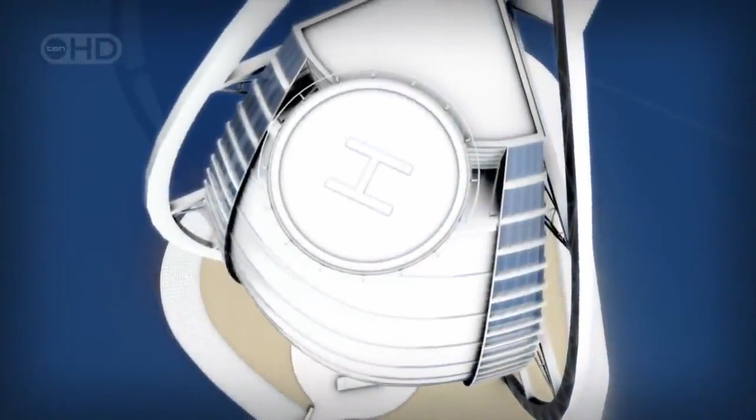Facing future economic meltdown, Sheikh Mohammed makes a crucial decision. He will turn his country into one of the world's most exclusive holiday destinations, a playground for the rich on the Arabian Gulf Coast. The Sheikh needs a luxurious centerpiece to launch his country into high-end tourism. He stakes what some speculate is over $1 billion on the tallest, most lavish hotel in the world, with a unique 7-star reputation, the Burj Al Arab.

I think it was very important to put Dubai on the map of the world. There's no hotel like this hotel. It takes guts, and Sheikh Mohammed has a lot of guts.

The Sheikh's courage is clear from his choice of architects: a radical young team from Britain, brave enough to take up the challenge, but very short on experience. They are led by Chief Architect Tom Wright. We had an average age of 32, not a grey hair between us, and none of us had gone over about 15 stories. I was quite staggered by the scale and the immensity of the project. Tom Wright and his colleagues have a reputation for innovative engineering, but they're more used to designing schools and offices.

But Dubai is a place where connections can make all the difference. Through a contact in the ruler's office, the team gets its break. Sheikh Mohammed agrees to a meeting and is so impressed with their initial concepts, he awards them the contract.

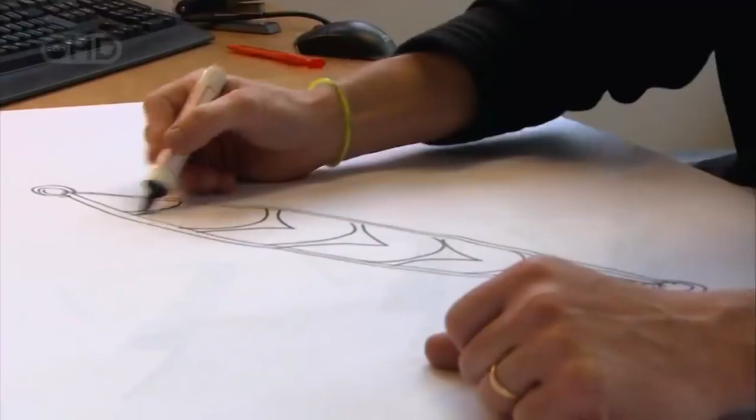Now Wright must turn his sketches into a design so remarkable, the building becomes a world-renowned landmark. We had many sleepless nights worrying that the building we'd designed wouldn't turn out to be at all iconic. Wright knows he must push his design to the limits. A building only becomes an icon when its form is simple but unique.

We decided that if you could draw a building simply with a few strokes of a pen, and it was instantly recognizable as not only the building, but the place - Dubai in this case - you'd created something that was iconic. So if you consider the buildings in the world, there are probably no more than 10 maximum that have actually achieved this status. Australia, Sydney Opera House. As with all these buildings, it's usually just the first couple of lines that actually make you know exactly where the building is. Paris - and you have to put a flag on the top.

Can Tom Wright and his team compete with the likes of Gustave Eiffel? This is a once-in-a-lifetime challenge.

All the brainstorming pays off when Wright finally has his eureka moment. We were sitting there having a beer, watching the modern sailing yacht come out of the Dubai Offshore Sailing Club. You think of excitement, you think of exhilaration, and we went, hey, this must be the one. The form we came up with is very simple, and within a few lines, I think you can see that it has all the elements of an iconic building. It's simple and instantly recognizable.

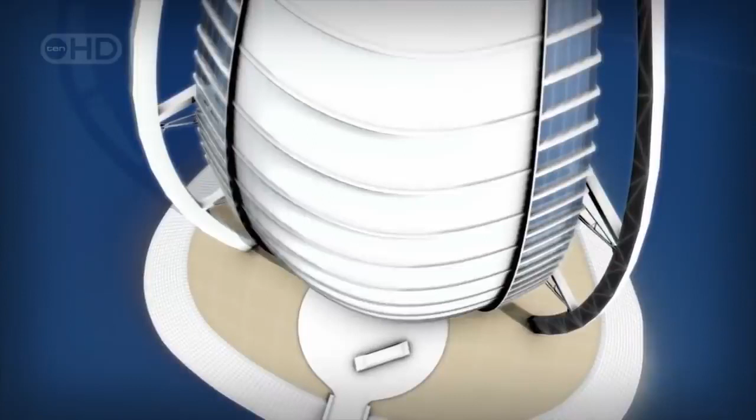Wright has won the first of many battles. The Burj will rise out of the sea. But time and again, his refusal to compromise will force his colleagues to push the boundaries of engineering to the limit.

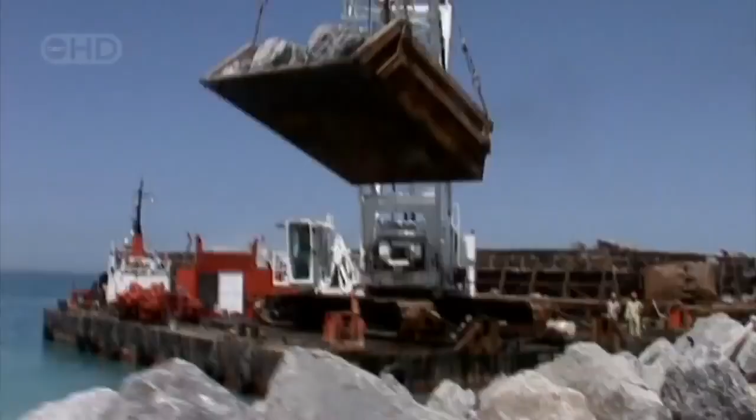By early 1995, the construction team is hard at work on Phase 1, building a low-lying island. But the inexperienced architects are about to get a taste of Dubai's extreme weather.

April the 27th. A powerful storm known as a shamal sweeps across the Gulf, hitting the coast with a vengeance. A set of construction barges lie in its path. Each is laden with 10,000 tons of rock.

The architects have planned for all weather conditions, but the storm's intensity still shocks Simon Crisp. We had 3 or 4 metre waves bashing onto the beach. To see the waves coming in like this was really quite a wake-up call for us.

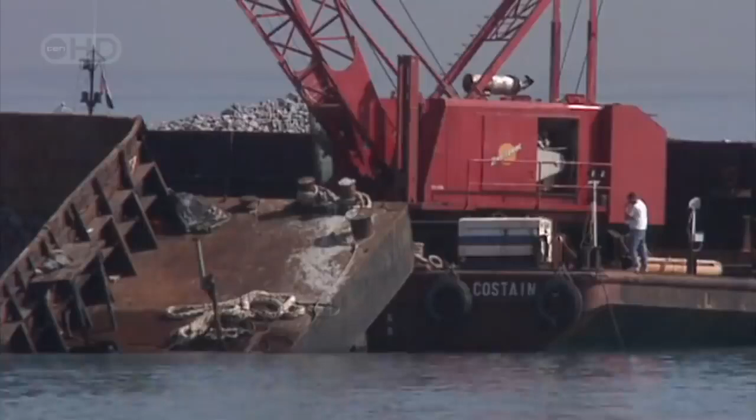One huge barge breaks loose and slams into the mainland. The team realizes the damage this kind of storm could inflict on their island hotel. We had a really graphic example of how powerful the Arabian Gulf can be when it's angry.

The architect's decision to expose their structure to these forces could have serious consequences. The engineers will have to struggle to produce a low-lying island capable of resisting nature's fury.

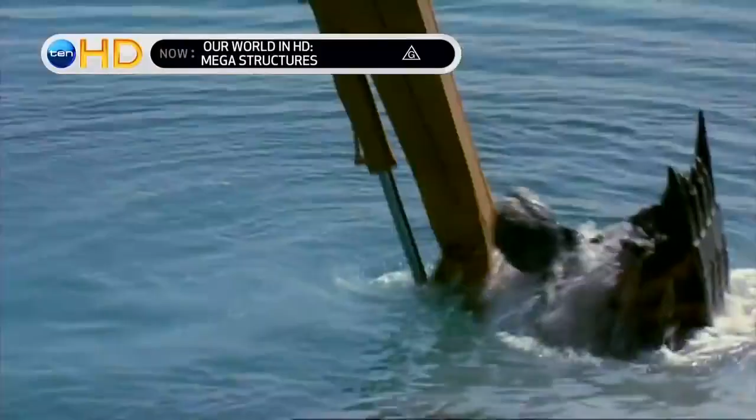The man-made island for the world's tallest hotel has hit a critical stage just 5 months into the build. Dubai's Sheikh Mohammed is depending on this project, the Burj Al Arab, to convert his country from oil producer to top-class tourist destination.

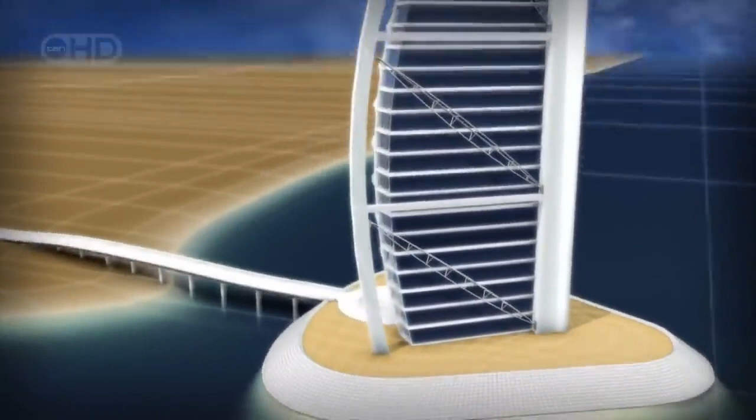But a debate rages over the island's height. Architect Tom Wright wants to make it low to give the impression of a sail rising out of the water. We argued a lot about the height of the island. From a design point of view, I wanted people to be close to the sea.

From the start, he's gone head-to-head with engineer Mike McNicholas, who's responsible for the island's safety. So I wanted the island as low as you possibly could, you know, skimming the sea. I'm coming from the other end, needed to make sure we were protecting the island.

McNicholas's worst fear is that waves breaking over the island could damage the hotel or even drag guests into the sea.

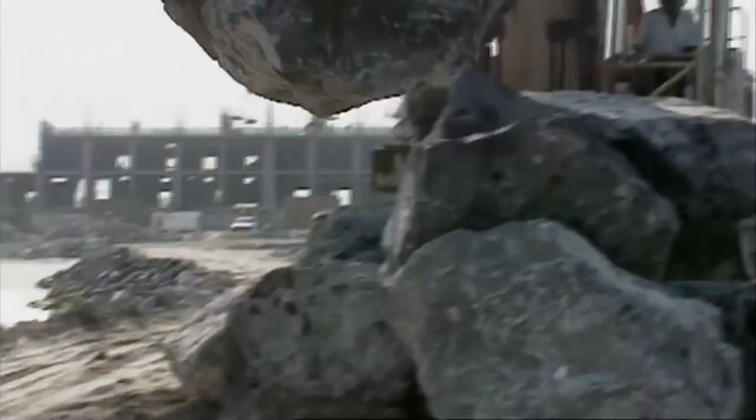Initially, the engineers planned to build the island using rocks. They are available locally and the technology is proven. But Wright rejects this. A rock island would have to be far too large to repel the sea safely.

To keep the island low, McNicholas experiments with pioneering concrete blocks designed to reduce the impact of waves. But no one in the Gulf has ever used these blocks before. I had to insist with the team that we carried out tank testing. It was the only way we were going to be sure that the island would be safe.

These tests replicate the power of the tallest waves that can occur once in 100 years and sends them crashing into a series of differently configured models. 3 weeks of testing prove the hollow blocks will work.

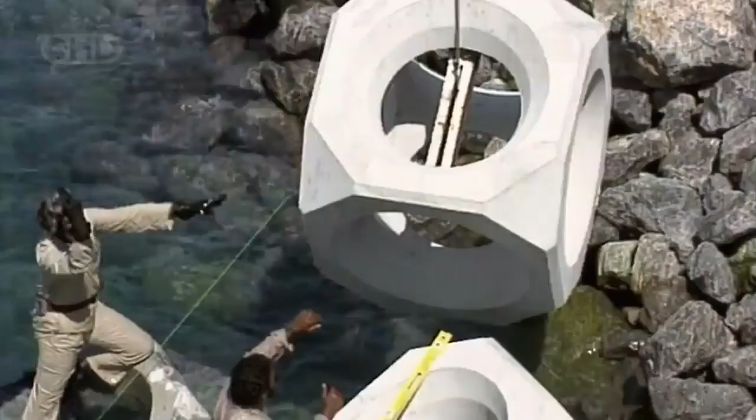The construction team builds the island with steep rock slopes, then covers them in concrete armor to absorb the force of the waves. These ingenious blocks work like a sponge. As the wave hits, the water passes inside the space and turns around on itself. The force is largely dissipated.

With the engineers' help, architect Tom Wright has won his battle for a secure island that rises only 7.5 meters above the waves. Now the team begins the second stage of construction.

In the center of the island, construction workers drive huge lengths of steel 20 meters into the ground. This creates a triangular steel wall known as a cofferdam, which will become the outside of the hotel basement once they excavate the sand from inside.

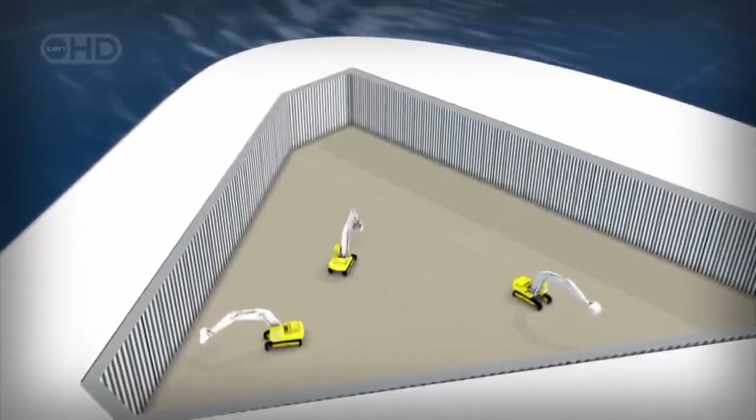But removing the sand could be dangerous. That was a real challenge for us. It's sleepless days and nights, 7 days a week, figuring out how we were going to stop the seawater coming into the structure, coming around our structure from beneath and flooding it.

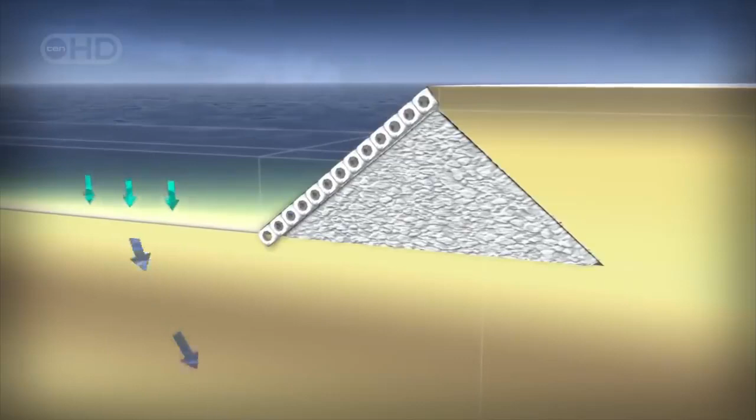The weight of the sea is a huge force on its bed. This pressure forces water through the sand and threatens to flood the artificial island from beneath.

To keep the sea out, McNicholas injects liquid cement into the sand to seal off his steel wall from below. But as the sand is removed to form the basement, there's less and less weight to hold back the force of the sea. The cement seal is going to be tested to the limit.

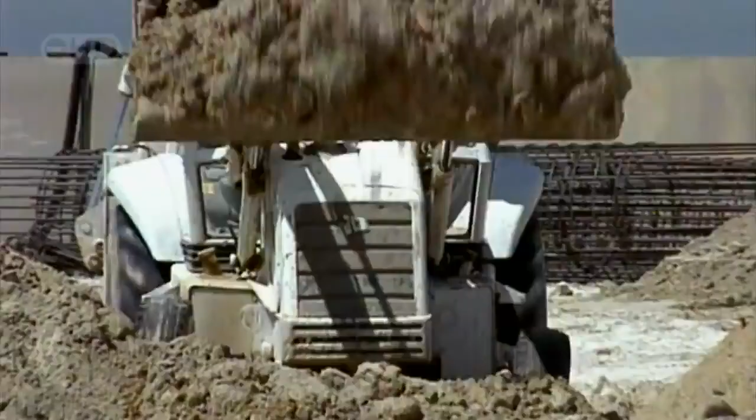In the worst case, the pressure caused by that water movement could have blown the whole bottom of the excavation like a champagne cork. If McNicholas's calculations are wrong, the excavation could be swamped, killing hundreds of workers. But he stands by his design.

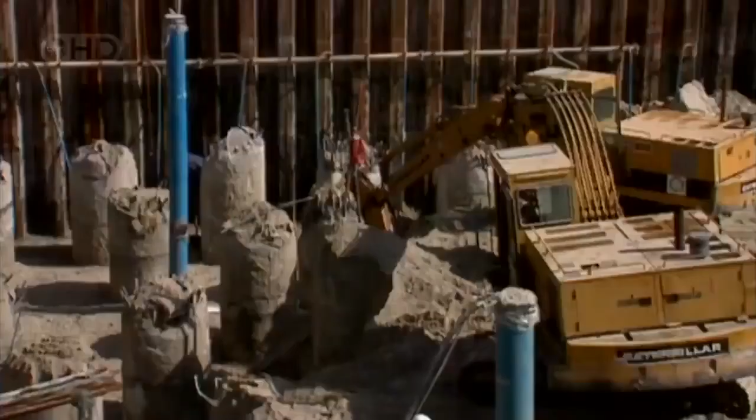With the cement seal in place, the excavators begin to remove the sand. As the man responsible, he's not going to let the workers face the risk alone. I felt I had to be one of the first guys down at the bottom of the excavation, looking up 10 meters above myself, thinking each side of this cofferdam is 7,500 tons of sea pressure pushing in.

When put to the test, both wall and seal hold firm. One of the probably proudest moments of my career was being stood on that excavation and looking around and seeing the steel wall there surrounding me and thinking, we are holding back the sea. My design worked.

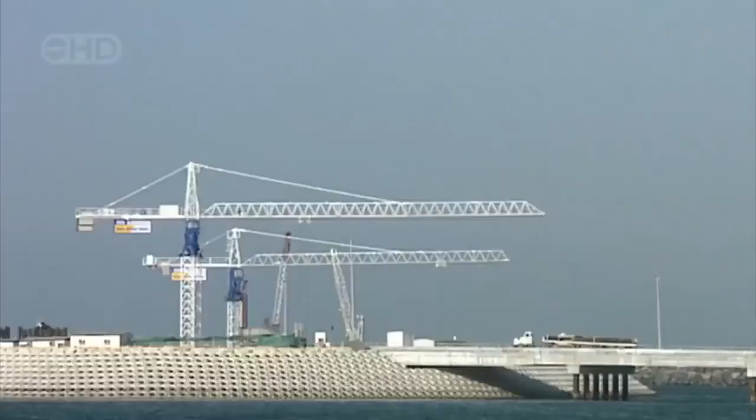November 1995. The artificial island for the tallest all-suite hotel in the world is now complete. The construction team starts phase 3 of this one-off project, the foundations. The support needed for any skyscraper is vast.

But the location of the Burj Al Arab presents an added challenge. It had never been done before to build something like this on reclaimed land. We're talking about a 300-meter high tower on a man-made island in 6 meters of the Arabian Gulf.

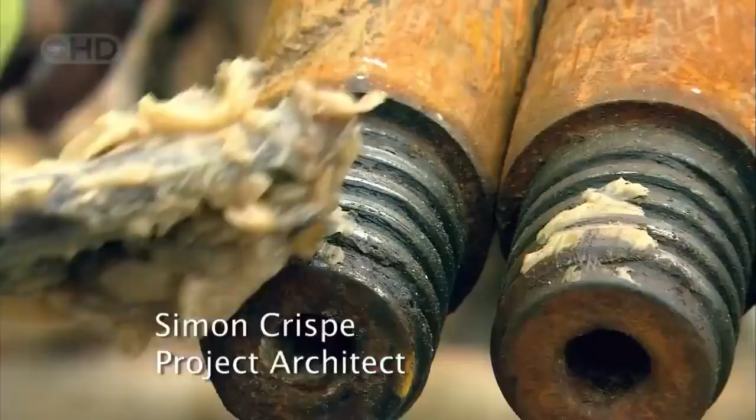The problems multiply when the results of earlier core tests reveal bad news. The team searching for bedrock drilled deep into the seabed, but even a full 180 meters down, there was no solid rock. This will make their job tougher, but the architects remain defiant.

The average person would think we're crazy to build something like this on sand, let alone out in the water. How will this 300-meter structure stand firm against earthquakes and winds of close to 150 kilometers an hour when its foundations depend on nothing more substantial than sand?

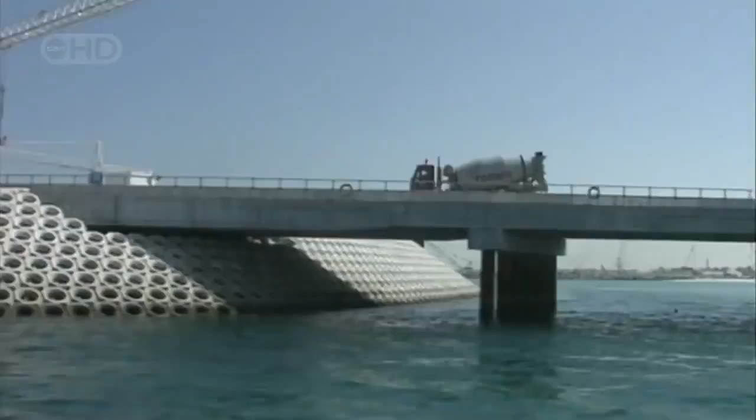On an artificial island 270 meters off the coast of Dubai, construction workers are preparing the ground for the tallest hotel in the world, the Burj Al Arab. But there's no bedrock beneath the site to support the foundations for a skyscraper.

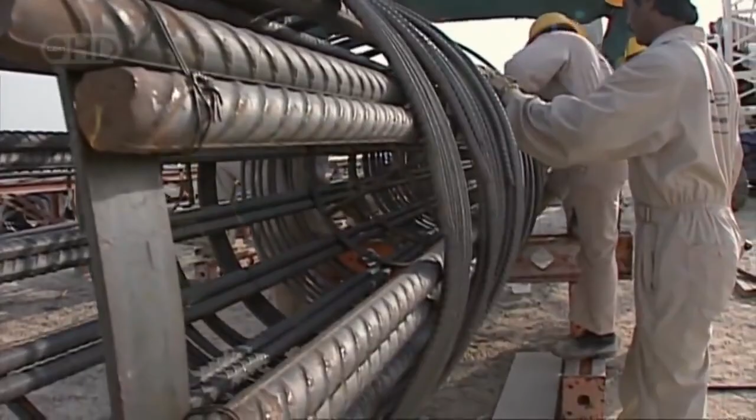The architects have a plan. They want to support the Burj using steel-reinforced concrete foundation piles drilled deep into the sand. So what's to stop the whole structure from just sinking? They are relying on an effect known as skin friction, the resistance that stops two rough surfaces slipping past each other.

Skin friction is all about the contact between the sand and the surface of the pile. The longer the pile, the further in the ground it is, the greater that effect. I'm going to demonstrate it now by whacking it in. You'll see it starts to move quite quickly with the first few impacts. Now it's starting to stiffen up a bit. Even though I'm not hitting it any harder or any softer, the skin effect is starting to really kick in here.

Once the friction between the post and the sand around it equals the load of the hammer, the post comes to a halt.

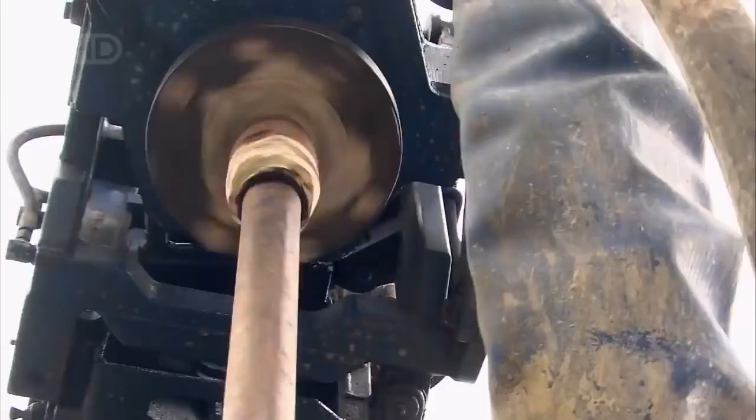The scheme will only anchor the Burj if the sand is compacted enough to create resistance around the building's piles. The drillers pack sand samples into sealed containers and send them off to be analyzed. If the results show the sand is too loose, then support on the piles anchoring the building could suddenly fail.

The geography of Dubai gives everyone reason for concern. It lies within range of a major fault line, so this soaring megastructure could be vulnerable to earthquakes.

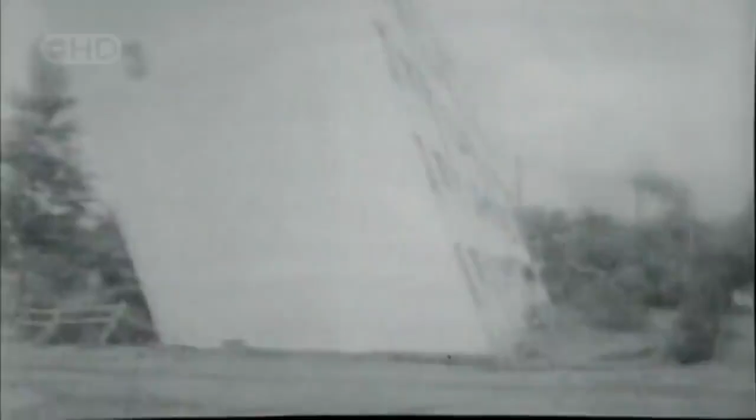In June 1964, a 7.5 magnitude earthquake hits Niigata in northern Japan. Because the area is built on sandy silt, the tremors flip over entire apartment buildings. This isn't normal earthquake collapse.

It's a devastating phenomenon known as liquefaction. As grains of loose sand shake, they fill up any air pockets and compact, taking up less space. The ground stops behaving like solid earth and acts like a liquid. On shifting sand, any building could simply topple.

When the results of the drilling tests return, it's good news. Deep beneath the site, they find compacted and calcified sand. Liquefaction is not a threat. But will the foundations be long enough for the skin friction to hold them firm? We weren't going to take any chances, and we extended the piles by another 8 meters.

Atkins specifies foundations over 20% longer than originally planned. These 250 concrete piles have a combined length of 10 kilometers, 35 times as long as the towering hotel they will support.

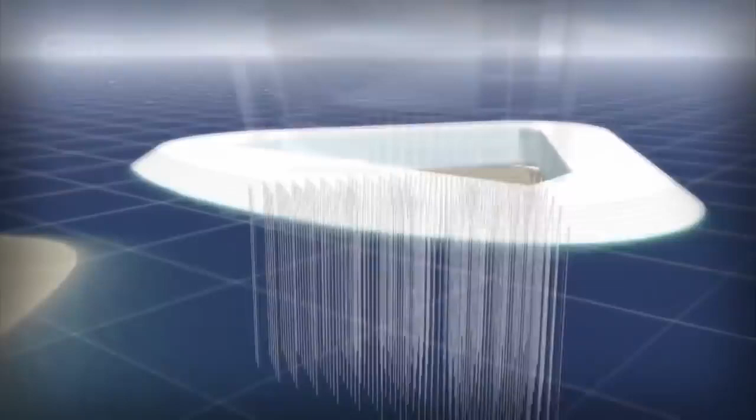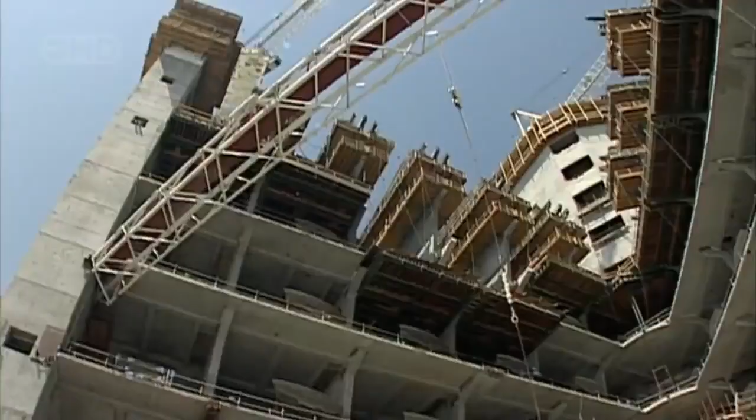One by one, the engineers are solving the challenges thrown up by this extraordinary structure. But in 1996, they brace themselves for a new set of obstacles as Phase 4, the construction of the hotel itself, begins. This building had to stand up to the worst that the Gulf could throw at it. The hotel itself has slender concrete walls, not capable of withstanding the elements alone.

To hold them firm against high winds and earthquakes, the architect devises a visually stunning solution: a gigantic steel structure outside the main building, known as an exoskeleton. A series of vast diagonal trusses tie two huge steel bows to the concrete core at the back of the building.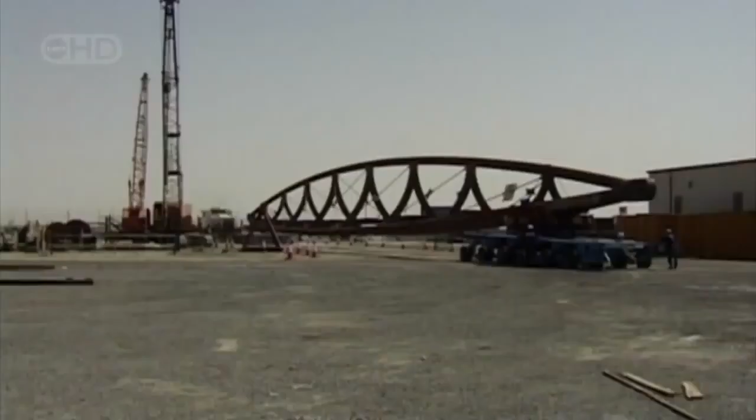Wright's design will make the building unique. But his giant diagonal trusses will make life hell for Anthony McCarter, the engineer who has to make them work. Those trusses gave me 4 months of heartache, sleepless nights, worries, anxiety. They must be incredibly strong to tie the exoskeleton together. But aesthetics are just as vital. It was critical that these diagonals were very, very elegant and also very beautiful as they're so visible.

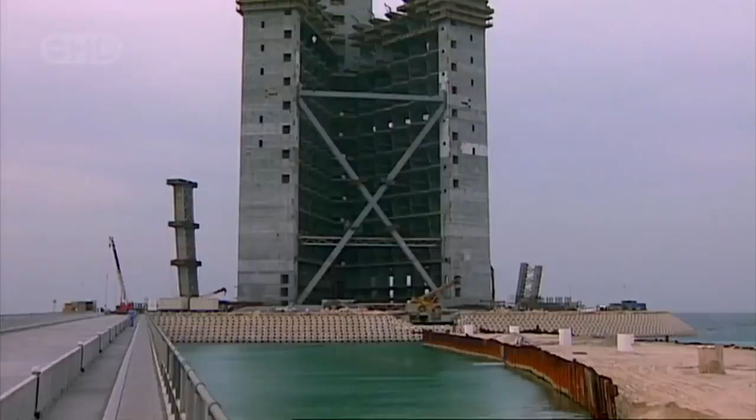This building has to wow the world and make Dubai a must-stop destination. Wright's not about to compromise. I used to go to Tom with option after option. I remember one particular occasion where I had 7 options and he went, no, no, no, no good, no good, no good.

Eventually, McCarter finds a form that works structurally and is graceful enough to fit Wright's vision. But this in turn causes nightmares for Malcolm Murphy, the chief contractor. It's okay for the architect to draw pretty pictures, but we have to build it.

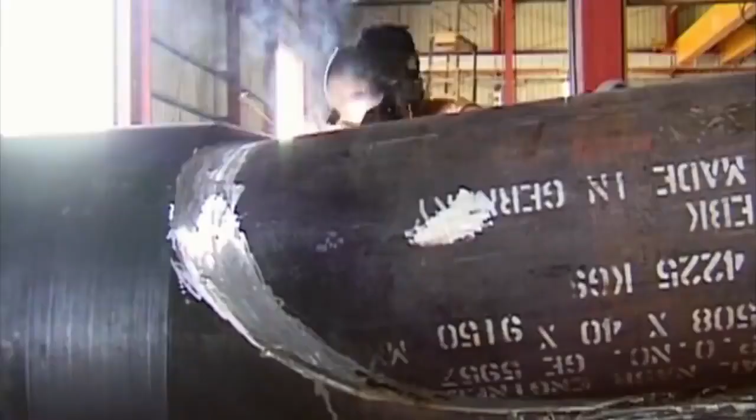He finds a factory just 15 kilometers from the construction site capable of welding the huge diagonals. Each one is longer than the Airbus A380 Super Jumbo and heavier than 20 double-decker buses. Welding these complex forms in the factory is the easy part. Transporting them to the site is not. With each truss weighing in at 165 tons and reaching a staggering 85 meters in length, it's no easy task.

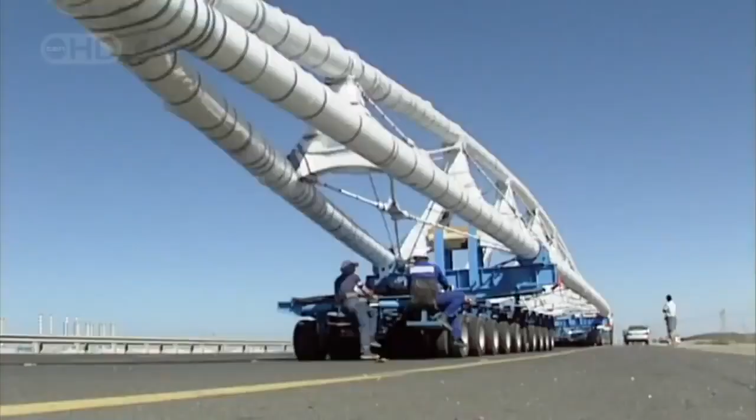And the challenge is to do that. It's just unbelievable. No one has ever transported anything this size before in Dubai. But Murphy's not going to be beaten. He brings in one of the world's largest heavy lift transporters, a beast with a total of 80 wheels. It makes the slow journey to the construction site at an average speed of around 6 kilometers an hour. Police must close roads and remove traffic lights to allow this convoy through.

When they finally reach the site, the contractors face their next hurdle. These 165-ton beasts have to be lifted into position. The architect refuses point blank to position these things in 3 pieces, which we wanted to do originally. And he said, no, aesthetics, I'll not let you weld up there.

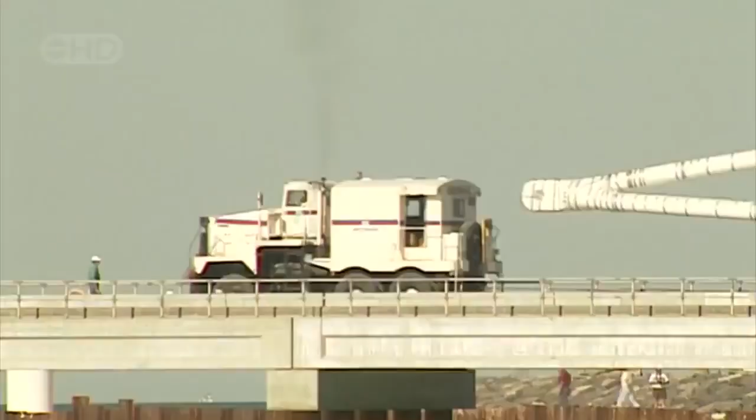He has to find a way to lift the trusses in a single piece to a height of almost 200 meters, twice the height of the Statue of Liberty. We had to go away and think of an idea how to actually lift these monsters up. We had 3 big monster cranes in there, and even they weren't big enough to lift the diagonal trusses.

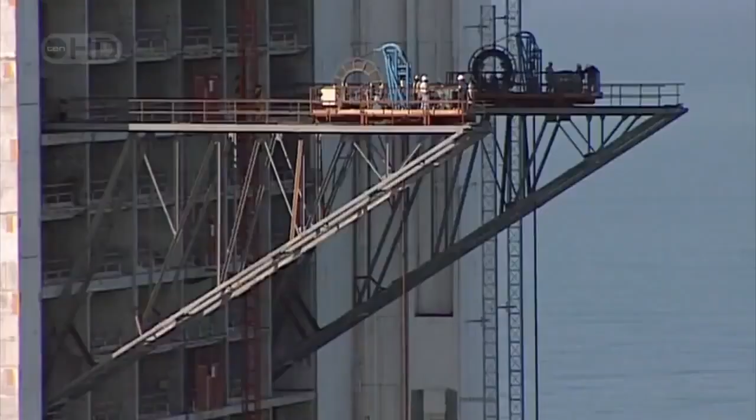Murphy must look further afield for a solution and brings in specialist lifting gear from Singapore. His team sets up winches, like those used on offshore drilling rigs, high on cantilever frames 15 meters from the building. Cables with a breaking strength of 225 tons are attached to the end of the truss. I can assure you we were very, very nervous that morning when we lifted the first one. 30 or 40 guys had sleepless nights that week, getting ready for that first lift.

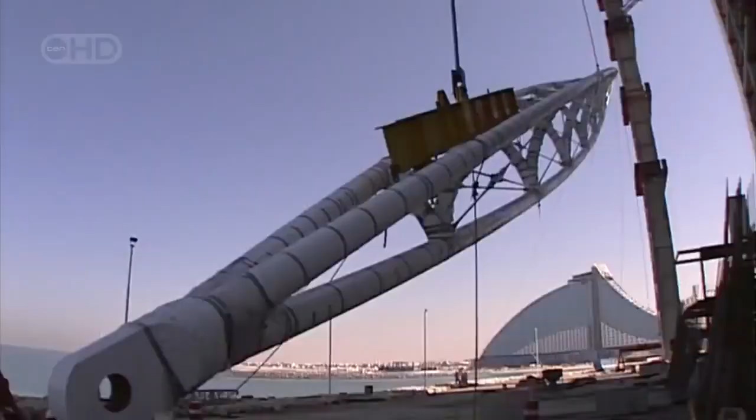The two massive winches take up the strain and painstakingly raise the diagonal truss little by little up the side of the building. It's all going to plan. Murphy and his team have solved the lifting dilemma. But these trusses have a sting in the tail - they need to fit into place with pinpoint accuracy.

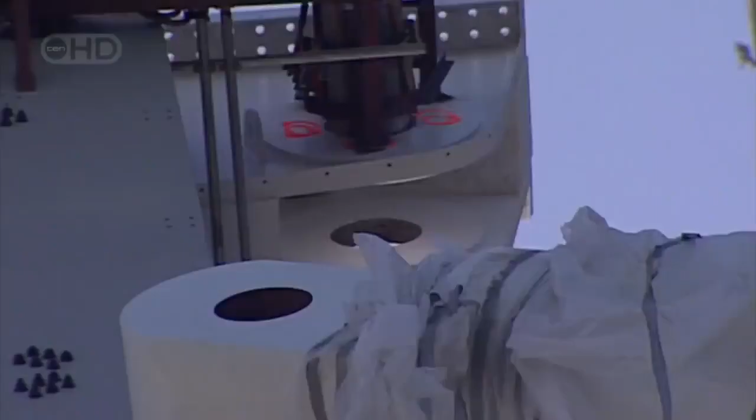Dubai's climate means temperatures can vary by as much as 14 degrees in a single day, and this will make the trusses expand and contract dramatically. The problem's known as thermal expansion - the steelman's nightmare in the desert, working at 50 degrees C. Steel expands in the heat and contracts when cold.

Okay, chaps, light up. We're actually going to heat the steel up now, which is going to give you an idea of what temperatures we're working in the desert. Heat makes the steel molecules move faster and further, and this 15-meter tube actually grows in length. The difference is visible. What did I tell you? Steel does expand with the heat.

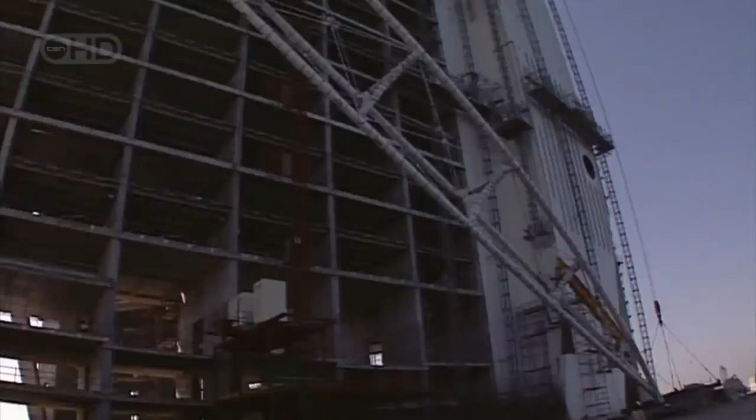The diagonal trusses on the Burj Al Arab could expand and contract by a full 5 centimeters over a 24-hour period. They will never fit their precise point in the framework without an ingenious solution.

The engineers thought about it, the structural fabricators, the steel fabricators, the architects, everybody thought about it, and it was actually one of the architects who came up with this great solution.

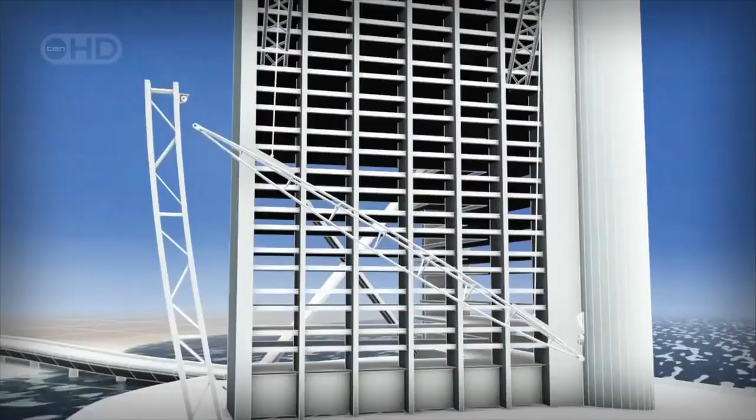On the frame of the structure, the fixing bracket contains a vast washer with its hole offset from the center. This swivels until it lines up with the hole in the diagonal truss. Then the cast steel pin, about 30 centimeters in diameter, is inserted through both holes, locking them together. This clever device buys the team the crucial 5 centimeters of play they require for the installation, and the truss is now fixed securely in place.

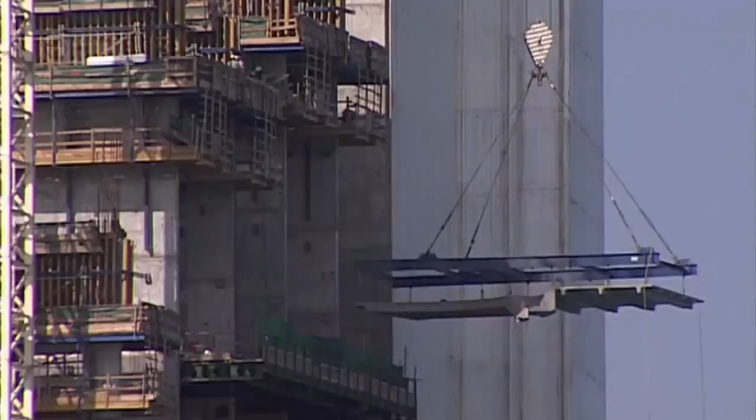When we got that pin in, we had those champagne corks flying. It was just unbelievable. But there's precious little time for celebration - the first VIP guests will arrive before the millennium, leaving the team less than 36 months to complete the entire project. Sheikh Mohammed's vision for the Burj Al Arab meant that it was needed yesterday.

January 1997. A colossus is emerging out of the Arabian Gulf. The Burj Al Arab is to be the tallest hotel in the world, the last word in luxury, and a proud symbol for Dubai.

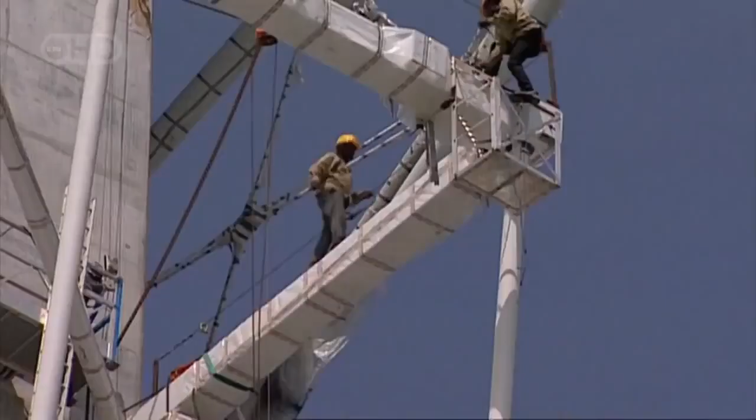Architect Tom Wright wants the building to be beautiful. The steel sections of the exoskeleton that will support it must be as minimal as possible. The view from these $2,000 a night suites will have to live up to the price tag. When you're in the suite looking through the windows, they are right in front of you, so they have to be exceptionally well detailed and well put together.

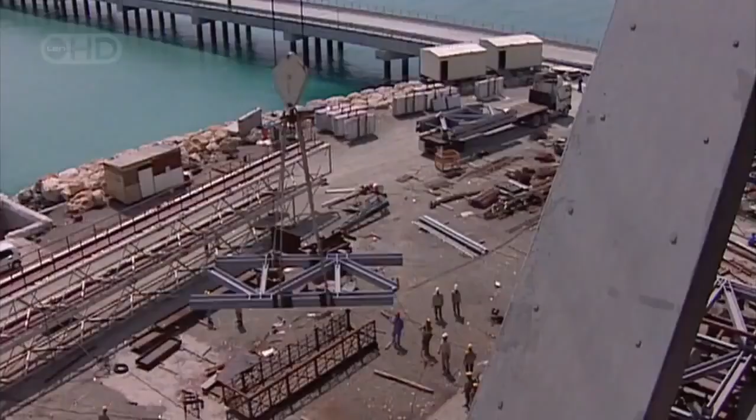But this creates a dilemma. If Wright makes the exoskeleton too light, the wind's force at 300 meters above the Gulf could shake the building apart. Too bulky, and the elegant form of his yacht-shaped structure is ruined. Once again, Wright and the engineers, who must make his hotel safe, are on a collision course.

When you're designing a building that is taller than the Eiffel Tower, and you've never done one before, you want to make sure that you've got it right. This structure is so unusual that, for the first time in Dubai's history, engineers decide to do tests in a wind tunnel.

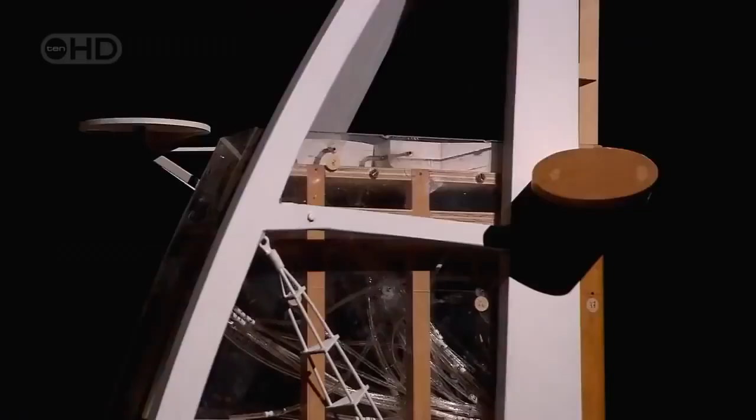Wind engineer Volker Buttgereit knows the Burj Al Arab is one of a kind. Before this building came along, most of the buildings in the Gulf were fairly orthodox shape - square, rectangular, nowhere near this scale. So doing a wind tunnel test for a building in those days in the Gulf was almost outrageous. But for this extraordinary structure, it's essential.

The wind tunnel simulates the wind effects of the Gulf around this 1 to 50 scale model. This building has seen some pretty severe loads, almost twice what it would see in London. We measured suctions which were the order of the weight of a car hanging off, trying to suck the panel off the building. So that's quite something.

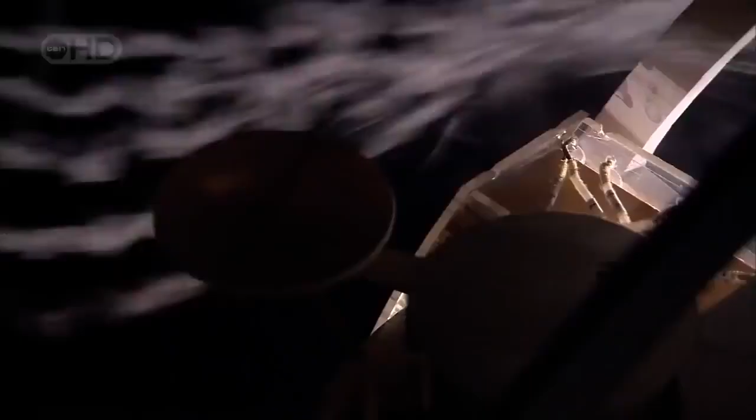The wind tunnel throws up results that could threaten the entire exoskeleton. When we first saw the design, there was immediate concern about vibration due to something called vortex shedding. Vortex shedding is an engineer's nightmare - certain wind conditions blowing over sharp edges on the steel structure can create miniature tornadoes. These set up dangerous vibrations that can shake a building to destruction.

Which is exactly what happened to these massive cooling towers in Ferrybridge, Northern England, in 1965. The engineers must find a way to protect the Burj Al Arab.

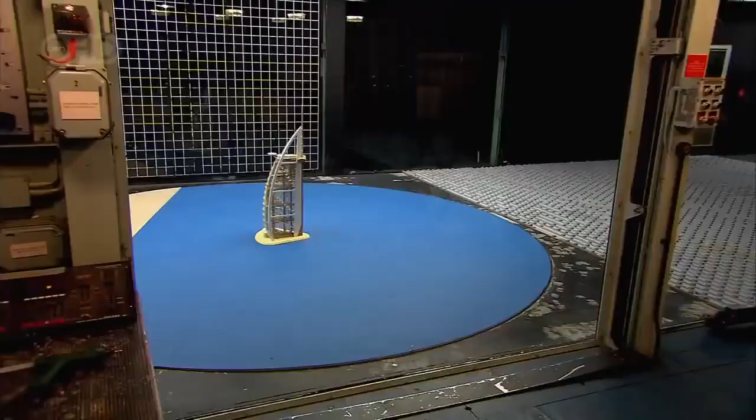The simplest solution is to change the aerodynamic shape, but that upsets the architect. The architectural idea of the exoskeleton structure is, when you look at it, the very essence of the building. If you take it off, it's just another building. If you put the exoskeleton structure on, you have an icon. So the engineers need to think again.

This is classic vortex shedding. We realized we had to come up with something clever that was not visible, but somehow reduced the motion.

They turn to an ingenious hanging weight called a tuned mass damper. These are installed at vulnerable points in the exoskeleton. When the wind blows and vortex shedding starts to create dangerous vibrations, the 5-ton weight will swing instead of the structure and damp down the vibrations to well within safety limits.

11 of these systems are fitted from the top of the 60-meter mast all the way down through each of the steel bow structures. These dampers safely cancel out the threat.

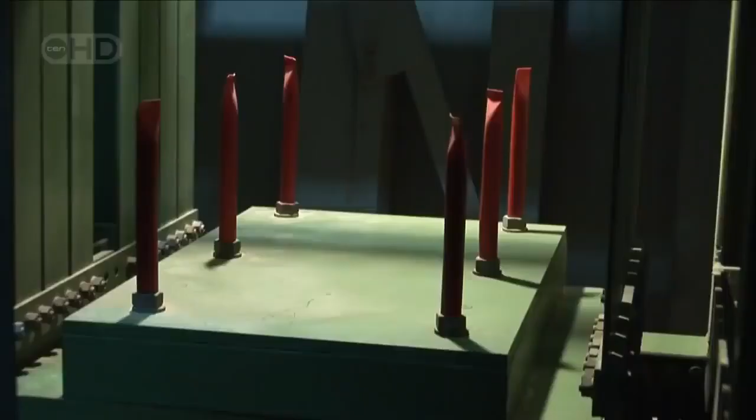June 1997. Dubai is reinventing itself as the luxury tourist destination. This old hotel bites the dust as the Burj Al Arab, the symbol of the new Dubai, approaches its final form. Just 30 months before the deadline, the crew begins constructing the toughest engineering challenge.

Sheikh Mohammed wants the building to amaze, so the design calls for a restaurant that looks as if it's suspended in the sky. I like the idea of the visitor sitting out in space, looking across the view towards the Arabian Gulf and Dubai, and almost floating up in the clouds. The whole idea of hanging out over space would give you a dining experience pretty unparalleled.

The Al Muntaha, or Ultimate Sky View Restaurant, will soar 200 meters above the sea and project nearly 27 meters out on both sides from the building's narrow central core. Once again, Wright's throwing down a gauntlet to structural engineer Anthony McCarter. Can he secure this eccentric wing-like structure with no visible means of support?

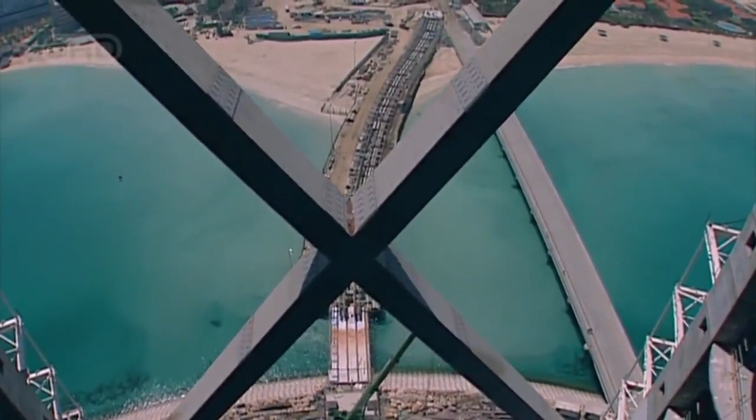And if the engineers get the calculations wrong, the whole thing could tumble 200 meters to Earth. McCarter finds a solution to the pull of gravity that pushes conventional engineering to new heights.

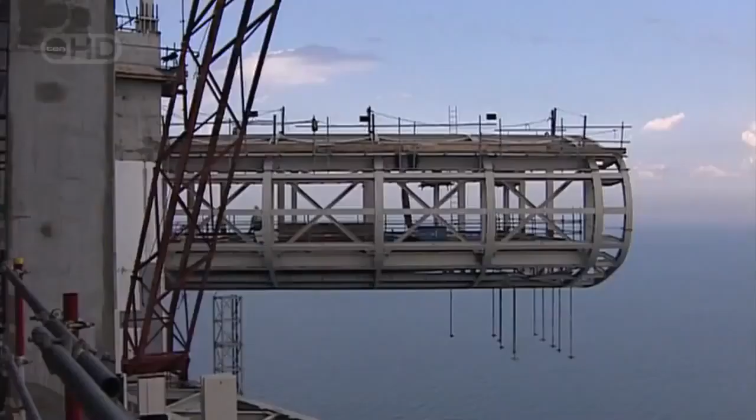In the concrete core at the back of the building, he casts a series of steel brackets known as embedments. 10 enormous steel girders radiate off them up to 1.6 meters high. These beams form the base of the rigid steel floor. The wing-like exterior can be attached to it, and then the entire restaurant is enclosed in aluminium and glass.

This gravity-defying structure will survive winds of close to 160 kilometers an hour. It's an engineering triumph.

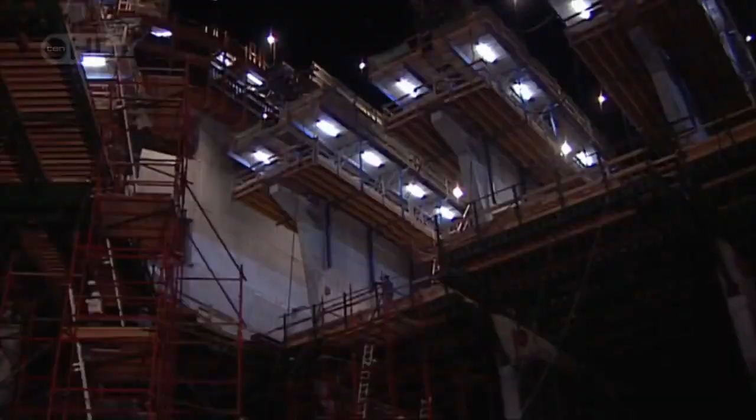But they are just 4 years into the 6-year program. No one can afford to take their foot off the gas. The program was relentless and challenging. 24-hour working, 6 o'clock site meetings in the morning, every morning. You live, sleep, breathe the building. The challenge really was: can we design it and finish it by the original program?

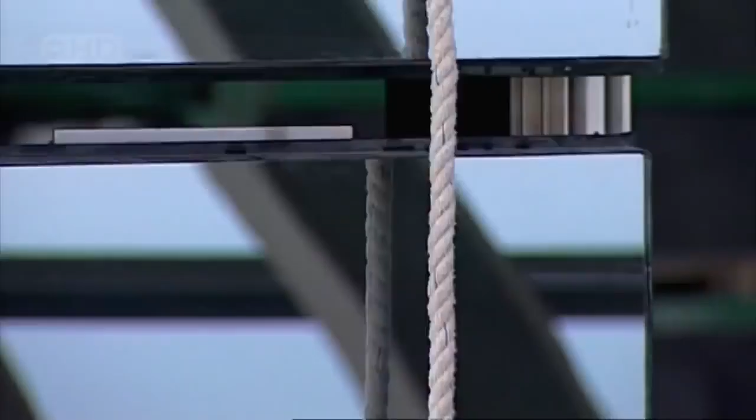The Burj Al Arab is due to open in time to celebrate the millennium, just 2 years away. The world's media are watching to see if the hotel will be the masterpiece the Sheikh promises, and if the team can complete it on schedule.

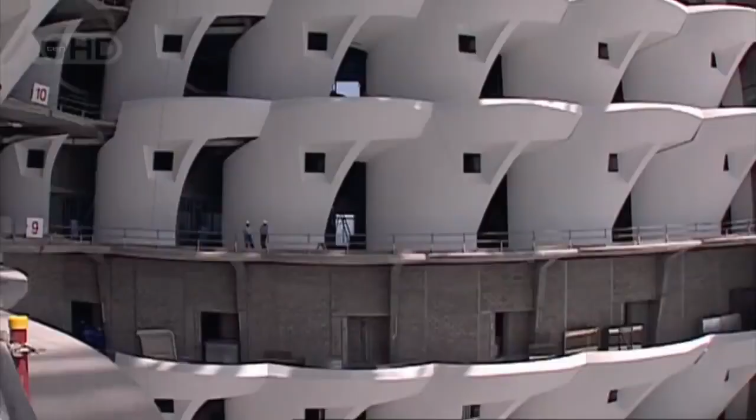The only way to deliver on time is to start the interior decoration long before the exterior is finished. In a temperate climate, this wouldn't be an issue, but humidity in Dubai reaches 100%, and temperatures can soar to a scorching 49 degrees. These conditions simply won't allow the team to fit delicate finishes like gold leaf, silk and carved wood.

If we'd started to put materials that were susceptible to moisture at that time, they would have just fallen apart. To make the deadline, the contractors need to air condition this giant building site and bring the temperature down dramatically.

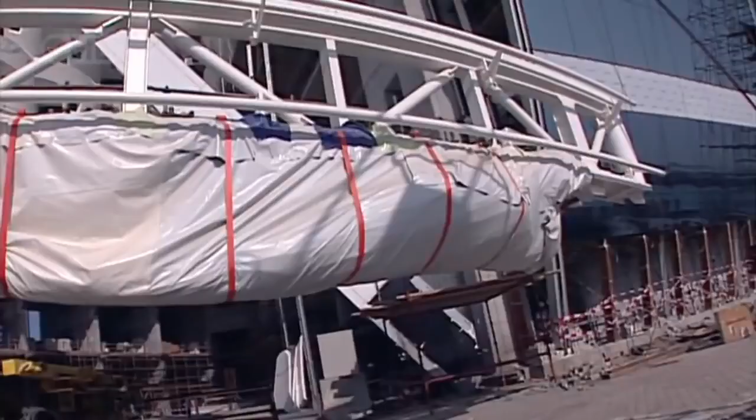The first step is to enclose the building by installing the final wall, Wright's iconic white sail. But it's going to be tough. When we first proposed the idea of the fabric sail wall, there was a lot of scepticism. People thought that it couldn't be done.

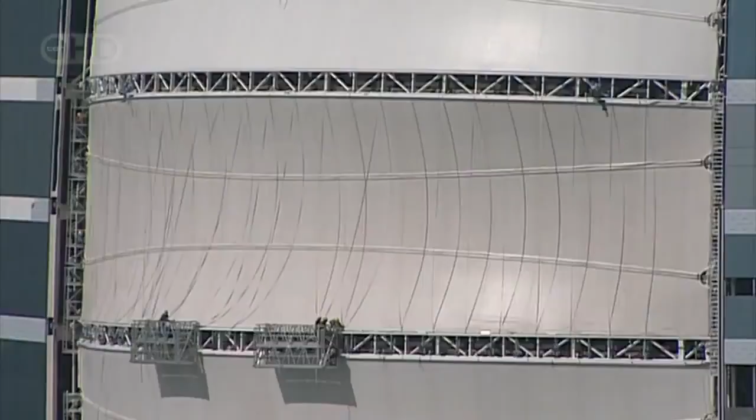They stretch woven glass fibre sections between huge horizontal beams. The surface is pre-coated with Teflon to resist dirt and sand. The result notches up another first for the Burj, the largest fabric wall anywhere in the world. The reflective properties of the white sail will help keep the temperature down.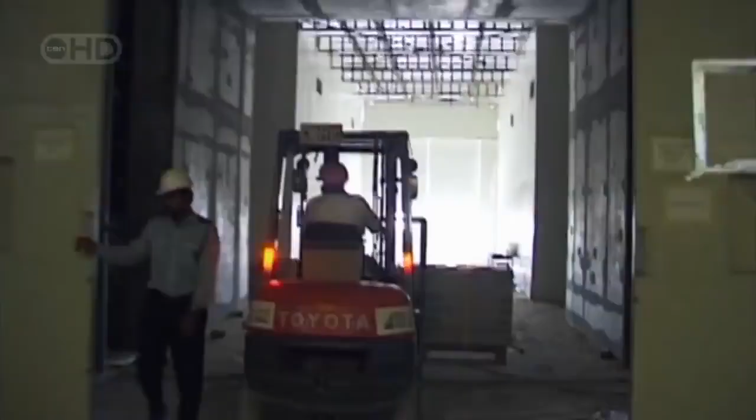But the contractors still need to find a way for trucks to enter the building without allowing in the desert heat. The solution is to install a huge airlock. Trucks drive in, the vehicle pauses as the doors close behind it. A second set of doors then open, and the vehicle moves out of the building.

The airlock and the sail wall now seal off the building. But cooling a space this large during construction could create a major setback. This unique structure now boasts the world's largest atrium, soaring to an amazing 180 meters.

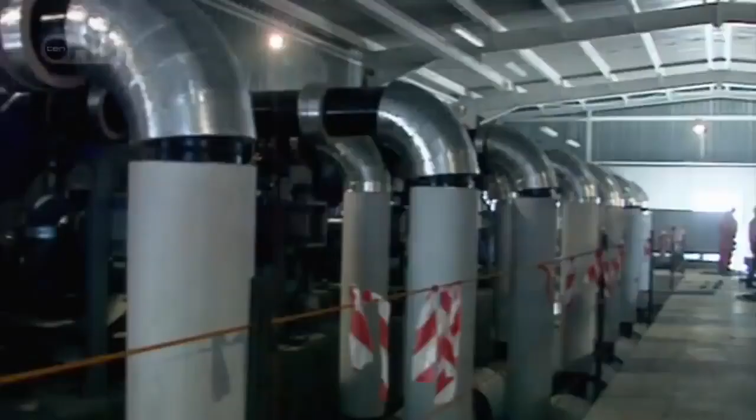All this warm air can hold far more water vapor than cold air. If they cool this hot, humid environment too quickly, they will create uncontrollable condensation. We could have had a rain cloud form at the top of the atrium and create massive damage to the interior design. The only way to avoid rain clouds will cost valuable time.

The contractors switch on the giant cooling system and bring the interior temperature down steadily by less than 1 degree a day. Given the schedule, it's painfully slow. We started to cool the building down in June 1998. By December 98, it was pretty well down to temperature.

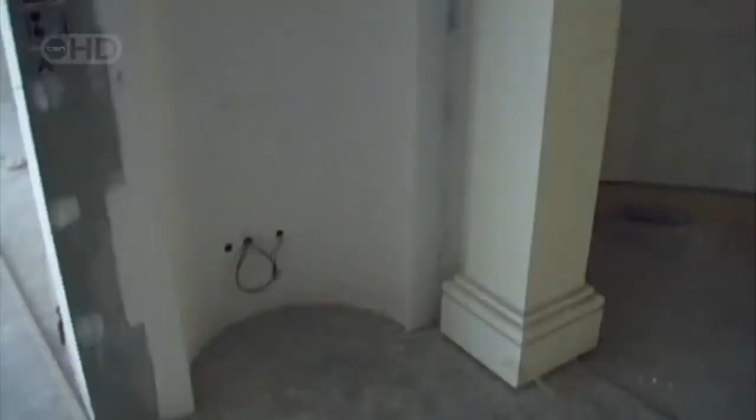At last, the interior decoration can begin. But the hunt for a designer who can create interiors worthy of a sheikh causes further delays.

Khuan Chew, who's already worked for the Sultan of Brunei, knows exactly what it takes to satisfy royalty. It's great news when she agrees to take on the most luxurious hotel on the planet, with its daunting 202 palatial suites and the 180-meter atrium. But she has just 24 months from design to completion to be ready for the guests booked in for the millennium.

I had a very, very tight program. So what we did was that the entire office, 50 designers, just dropped everything else. Solidly, we just worked on the Burj Al Arab.

She not only faces a frantic schedule, Sheikh Mohammed is expecting her to amaze the world. The brief basically asked us to design something that's never been ever designed before, and that will never be designed ever again.

Khuan Chew and her team pull out all the stops and begin to produce interiors they hope will match the Sheikh's ambition. But as they struggle to meet the deadline, another more severe problem comes up. The Sheikh wants to offer guests every conceivable electronic gadget in their suite.

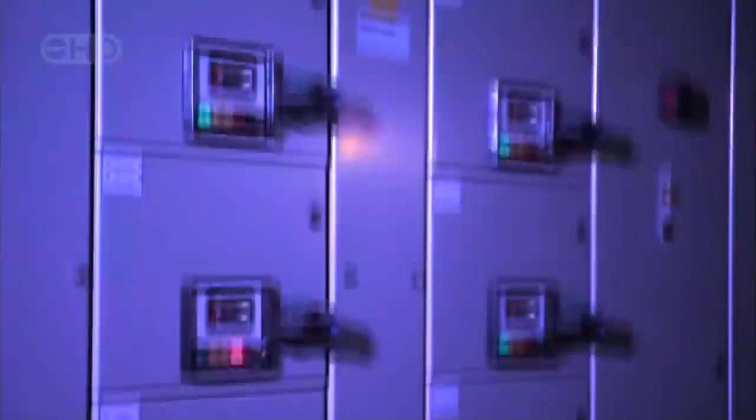There was a total redesign, a total change in the interior design, and that imposed overnight almost a 50% increase in the electrical load of the building.

The Sheikh's new plans mean each suite requires an enormous 14 kilowatts. That's 8 times the load of a normal European house for every suite. With 202 suites, that's roughly enough electricity for a town of over 6,000 people. The hotel will have electric curtains throughout, 52,000 lights, most of them on dimmers, and over 5,000 kilometers of electric cable.

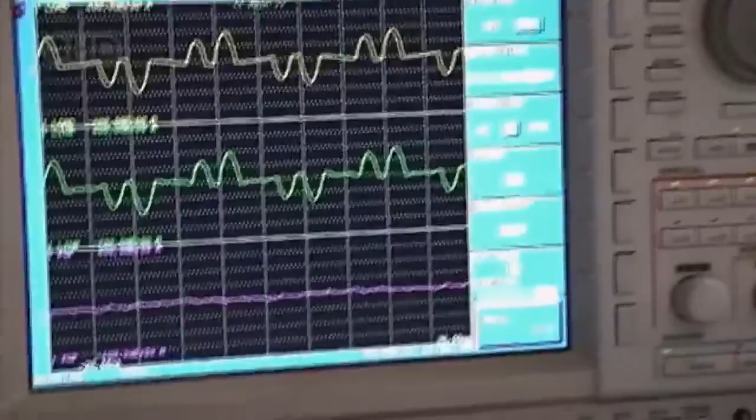All these electronics can scramble the waveform of the electric current and create a problem known as harmonic distortion. This can melt the sheathing around live cables and cause a raging fire. That was a situation which was just totally unacceptable. We had to deal with that.

The people of Las Vegas know just how lethal a hotel fire can be. November 1980, in the city's MGM Grand Hotel, a pair of electrical wires short-circuit. This causes a blaze that wreaks destruction. 85 people perish in this real-life towering inferno, and over 700 are injured. It's one of the worst hotel fires in history, all caused by a simple electrical fault.

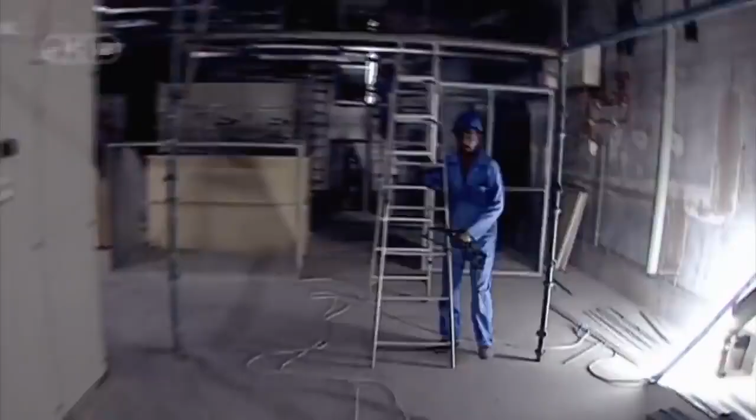Roos needs a solution to the fire risk, and fast. Obviously, the hotel was under construction. There were some fairly heavy deadlines to try and get the hotel finished and opened, and this was a major change.

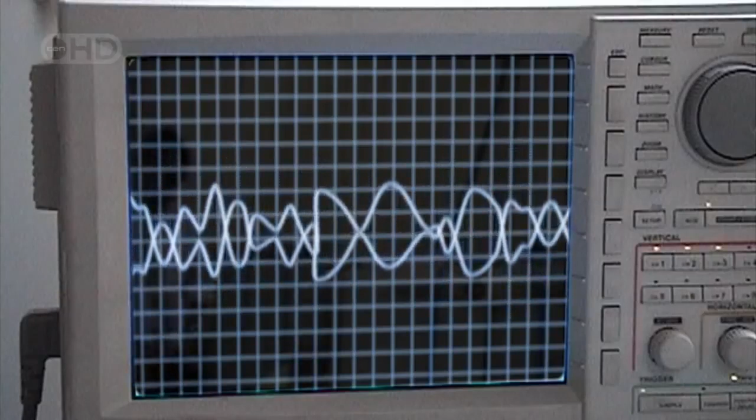His response takes electrical engineering to a new level. He devises a harmonic filter system. First, it detects the electronic distortion, then it sends a current that's the mirror image to cancel it. It's called antiphase and works like noise-cancelling headphones. He installs his filters on key floors, and at the point the electricity enters the building.

No one has ever attempted a system on this scale before. This was the largest active filter installation of its kind in a building like this anywhere in the world. A world-class solution for a world-class megastructure.

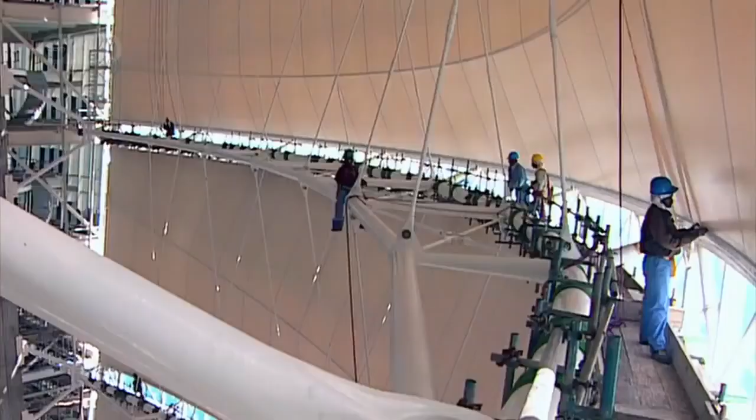The team constructing the Burj Al Arab can claim a string of groundbreaking achievements. They build the first artificial island off the coast of Dubai, construct the tallest atrium in the world, enclosed by the largest fabric wall ever built. And with the mast finally in place, this structure, for now at least, is taller than any other hotel on the planet.

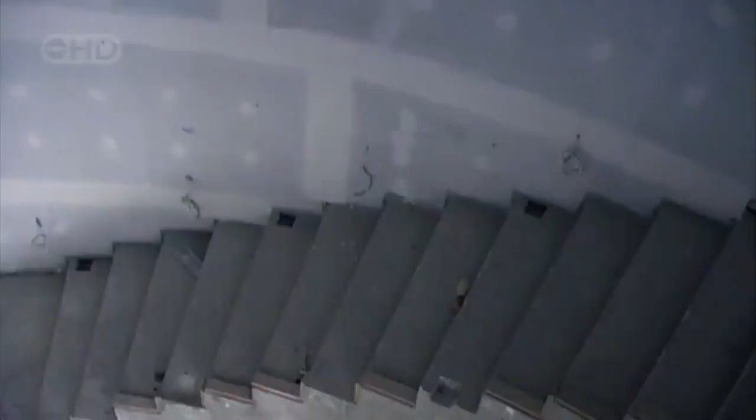Now, 5 years into the project, the team reaches an important milestone. The iconic exterior is almost complete, but the interior decoration of the world's most luxurious hotel is seriously behind schedule. This stage has always been a race against time. Now Sheikh Mohammed is about to send the design team into a tailspin.

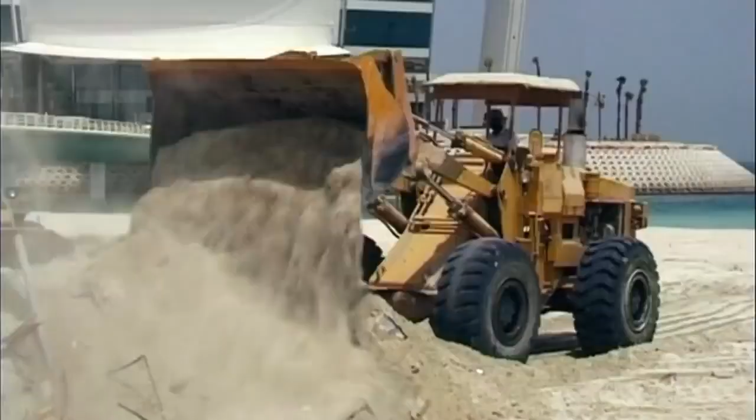Dubai, April 1999. The world's tallest and most opulent hotel is approaching completion. Everyone is rushing to finish the hotel, ready for the Millennium deadline. Interior designer Khuan Chew is still operating in overdrive. Christmas was cancelled, Easter was cancelled, bank holidays were cancelled. We basically made 50, 60-hour weeks.

The interior decoration is almost back on schedule. Then comes the moment of truth. Sheikh Mohammed arrives to examine her work and pass judgment. The man behind the whole project is delighted with the ornate styling of the luxury suites. But that's where the good news ends.

I was summoned and asked, when are you finishing off this atrium? I said, well, it's nearly done. Unfortunately, the feedback was no. Where's the color? The Sheikh completely rejects the white styling of the atrium. It's just too plain. Not exciting enough, not bright enough, not colorful enough, not rich enough.

Khuan Chew has to completely redesign and decorate the tallest atrium in the world in just 6 months. I was basically living and sleeping in the Burj Al Arab, rushing from area to area.

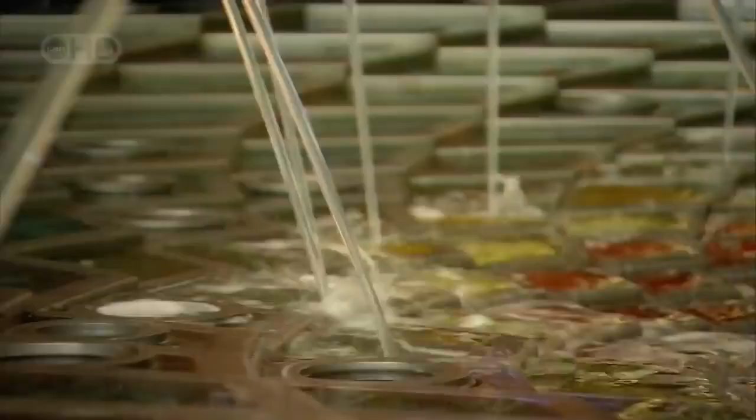This is her last chance to get it right, so she sets out to dazzle. She designs a light show to animate the world's tallest fabric wall. Fountains create aqua gymnastics in the lobby. Vast fish tanks welcome visitors as they ride the escalators. And crucially, she transforms the view up the atrium into a rainbow palette of vibrant colors.

Will it satisfy Sheikh Mohammed? Everyone's on tenterhooks. The adrenaline was pumping, sleepless nights basically before opening.

The Sheikh's response is a definitive yes. He's delighted and signs off on the project. Sheikh Mohammed believes it became almost a 6 to 7 star hotel, and the achievement of his dream, the realization of his dream.

The doors open to the first ultra-rich guests in December 1999, a full month before the millennium. And Sheikh Mohammed comes to watch the final sunset of the century from his magnificent new hotel.

Architect Tom Wright and the team have fulfilled the brief. Every part of this iconic structure is extraordinary.

In the ground floor restaurant, a team of divers care for 700 exotic fish in this 280 cubic meter tank. The result allows guests to get intimate with sharks while they eat. At the opposite end of the world's tallest hotel, this amazing feat of engineering, the Cantilever restaurant, delivers Tom Wright's vision of dining in the sky. A spectacular combination of fire and water greets you before you even enter the building.